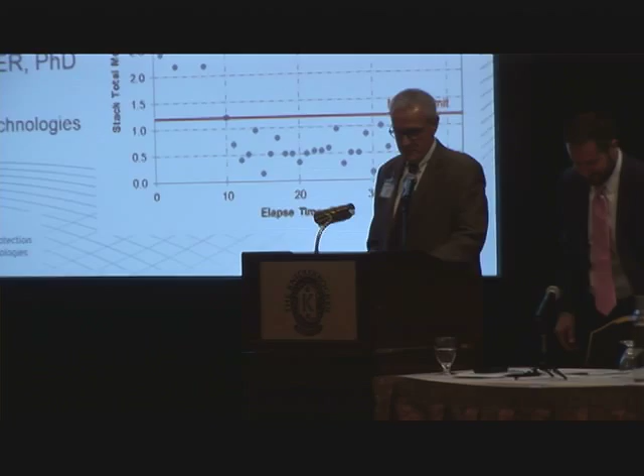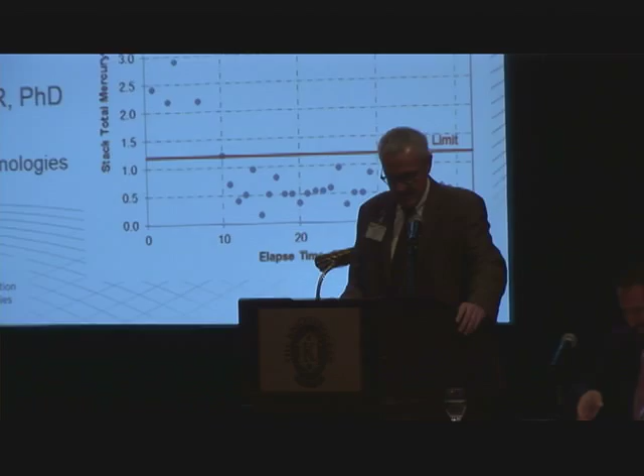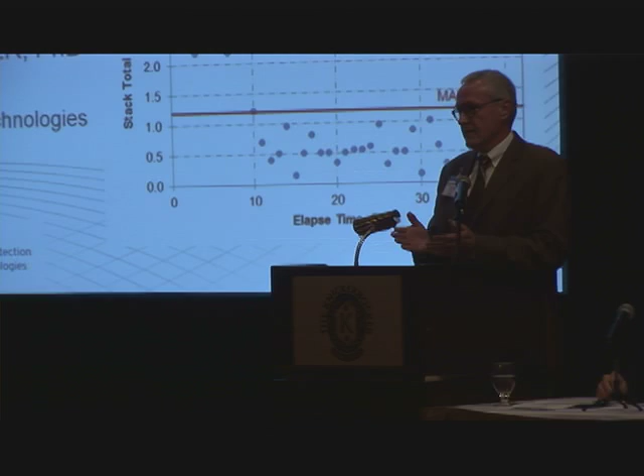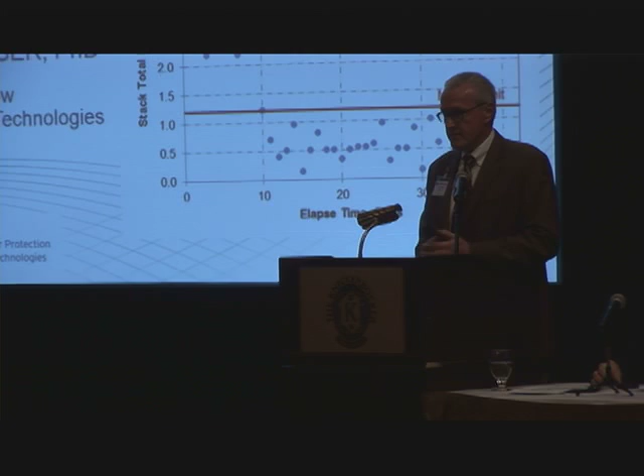Well, I'm not sure what I can do with more time. I'll probably go too long anyway, but I'll try and keep it to the half hour. I appreciate you taking the time to be here this morning. I'm a little bit in awe being kind of in between regulatory information that you really needed to know and the fact that we're seeing power generation evolve in Michigan. Evolution is really the part of this presentation I want to emphasize as we go through. I promised you at least four things you're going to learn: characterization, control and compliance, a strategy that puts you in control of your mercury emissions, and how to monitor and automate that process.

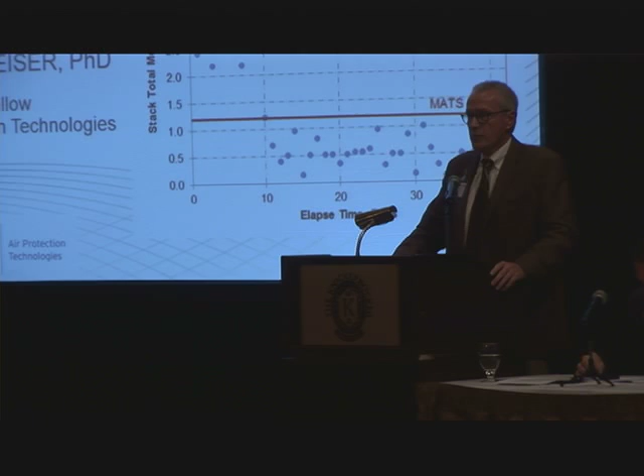Looking at the left or right side of this slide, on the left-hand side of the graph is where we are today. On the right-hand side is where we have to be starting next year, and we have to be there reliably, 24/7. I'm going to present the path to a reliable strategy: how to characterize and measure mercury in flue gas, then talk about the components in building your strategy, and finally a case study.

I want to start with a question and a show of hands, because I know I can get into a very technical meeting and everybody will go to sleep on me. So this is interactive: how many of you fly? Okay, how many of you are actually pilots? Okay, so the pilots go to sleep right now, because I'll probably not be technically correct on what I'm going to show you next.

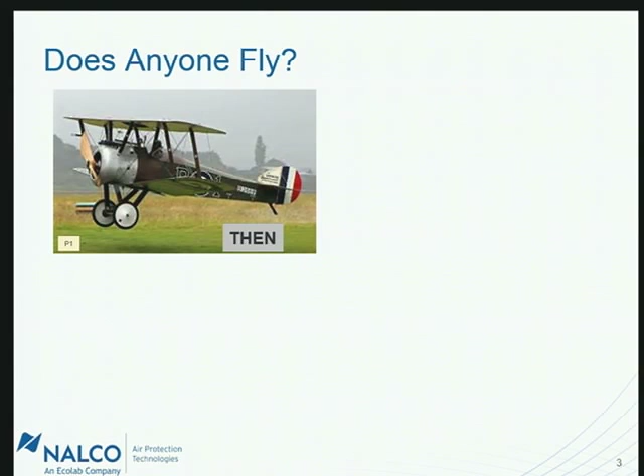When we started to learn to fly, we had an airplane something like this. And quite frankly, it had—hopefully it'll show up. Uh-oh, did I push the wrong button? Okay, I give up, it's supposed to go forward. Oh, there we go, thank you.

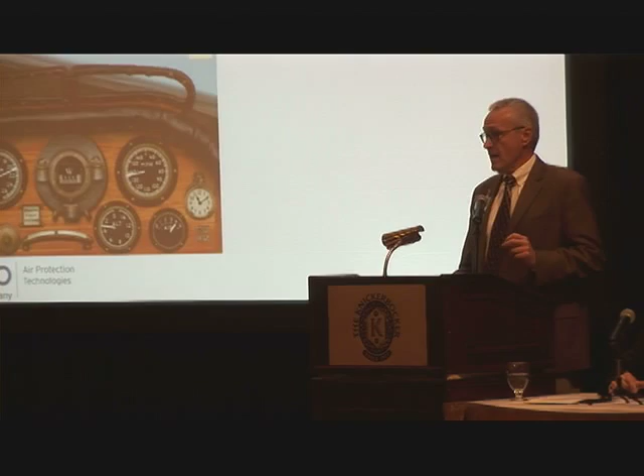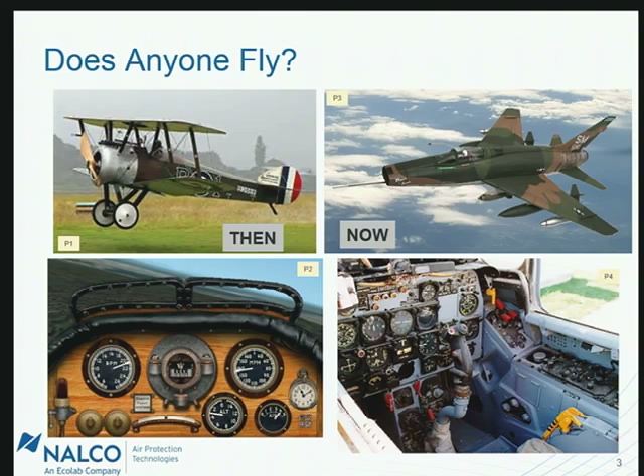When they started to fly, they had an instrument panel that looked like this. Very simple—it told you where you were going, what your engine was doing, and a little clock on the side so you could calculate how long you could stay in flight. That was great if you were flying visually, but as you know today, we fly through all kinds of weather most of the time, in the dark. So aviation has gotten more complicated, and as you can see, the new cockpit has many more instruments to go by. This is the evolution of flight.

Equally, there is an evolution in the power plant—an evolution in the control room from simply looking at air and fuel, mixing those, and looking at your heat output and the megawatts you generated, to also looking at what else we generate. How do we control mercury, as an example of a pollutant, going forward?

So there are basically five steps. You have to measure it first. You have to manage the speciation of mercury in the flue gas. You have to master it within the WFGD, if you're using WFGD as your strategy and control point. You have to monitor it continuously, just like you have to monitor the conditions, the quality, and the running of the engine of an airplane. And then you have to apply everything that you've learned.

Okay, I'm going to let you help me in the back.

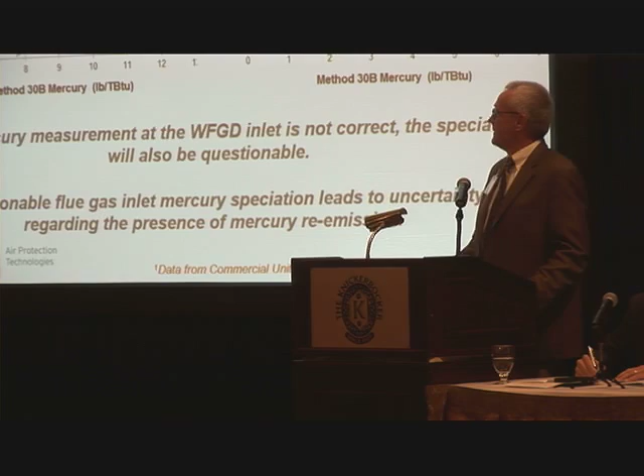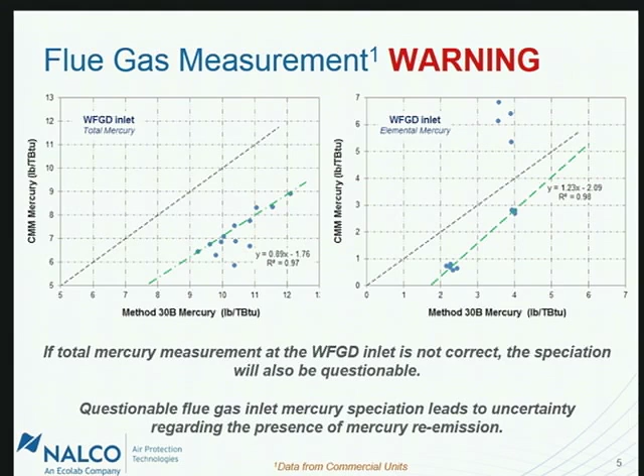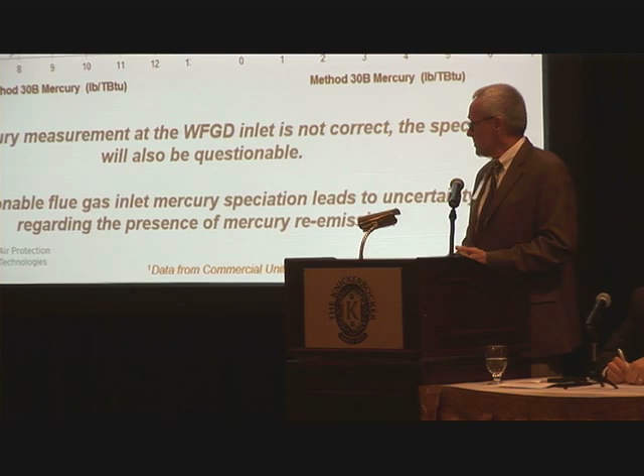This is the issue with measurement. The first and most important is making the mercury measurement in the flue gas. On the left-hand side, you see an example of commercial measurements being done, and they are far from being accurate with regard to flue gas mercury. If you drive your solution based on this information, you will be going in the wrong direction. So it's important first and foremost to have total measurements that are correct. If you get the total measurements correct, chances are you can rely on your speciation measurements as well. If you question the inlet data, you have to question all of your data, and you begin to wonder what is it that my unit is actually generating.

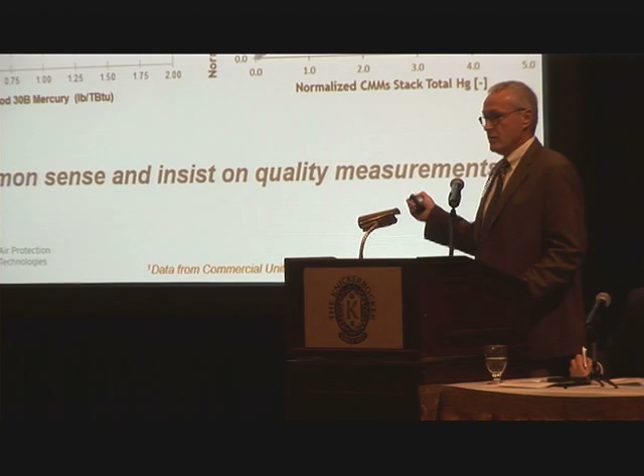Again, this is another example. On the left-hand side, a little bit better match between carbon traps and CMMs. The measurement of mercury in flue gas is not simple. There are a few organizations well embedded in this technology that consistently do a good job. This is good, but this is obviously much better in terms of your relationship and correlation between carbon traps and CMMs. If you're going to drive your unit based on CMMs, you better have a good correlation with what you're reporting to the regulatory body. So insist on quality.

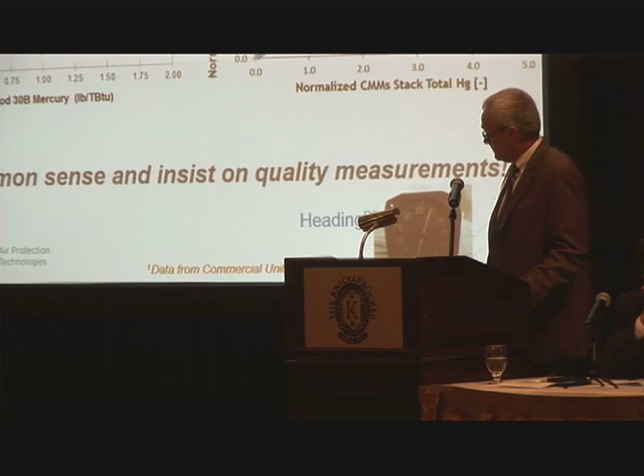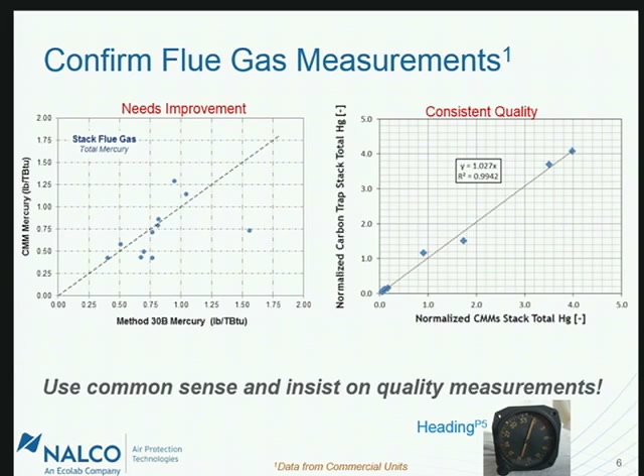To keep with the analogy, the measurement of mercury is a lot like knowing what your heading is. As a pilot looks to see what his heading is going to be based on this instrument, your measurement is the same thing. If you have a poor heading, obviously you're not going to end up in the right place.

Okay, so next, let's talk about managing mercury speciation.

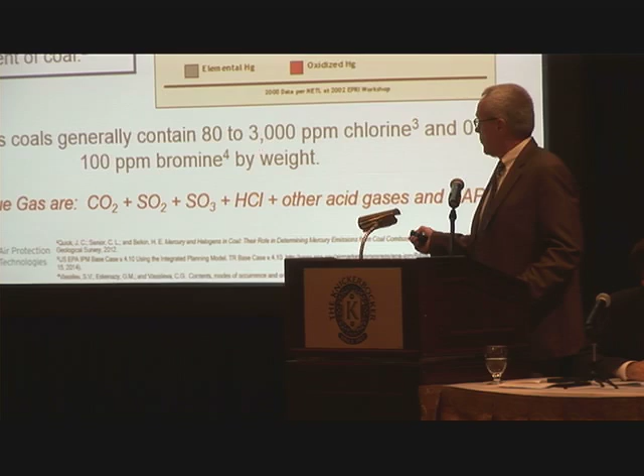Busy slide, you've seen a lot of this information before, you can take the time to read it while I'm speaking. But key among this is there are a lot of different forms of mercury, but if you're using a wet FGD to control your mercury emissions, you must maximize oxidation in the flue gas. That is done in bituminous coals. It's clearly correlated with chlorine content, and yes, there is a certain amount of bromine content in that coal as well. Both of those halogens will increase your speciation across the various air quality control devices.

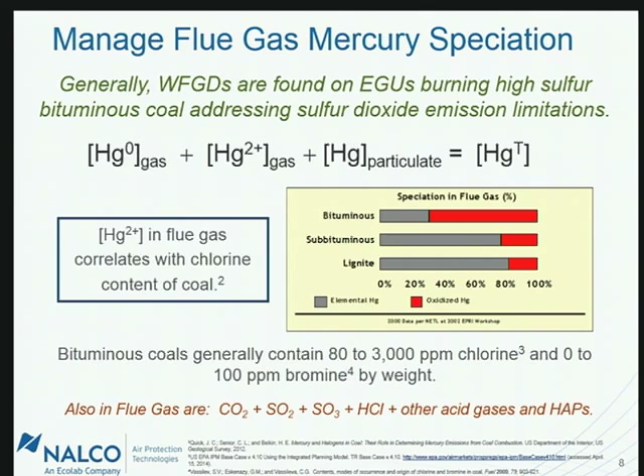Okay, I'm going to give up here. Next slide, please.

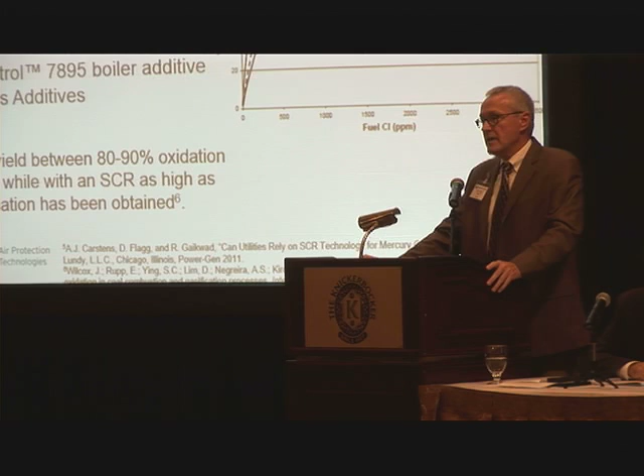To manage your speciation, there are three different ways you can do it. You can do it based on fuel, based on fixed assets, or based on additives. Fuel is simple — you take a low chloride content and a high chloride content coal and mix those. Fixed SCRs will, in fact, give you the co-benefit of increasing your mercury speciation. And then additives, boiler additives such as MerControl 7895, provide additional halogen. It allows you to fine-tune your oxidation of mercury across the unit. In fact, additive use will increase or provide you with, in the absence of an SCR, somewhere between 80 and 90% oxidation, and up to 98% oxidation with an SCR present.

You can see on the right-hand side of the slide, I apologize, a graph that was put together that shows the impact of age on an SCR, and the fact that as the SCR catalyst ages, you will lose oxidation effect on your mercury.

This is your altimeter. This tells you how high you are flying.

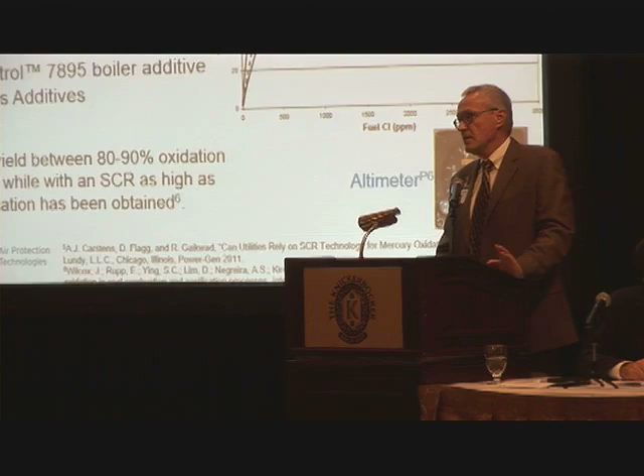Again, it's most important for you to maximize your oxidation, because with wet FGDs, only oxidized mercury is removed. Next slide.

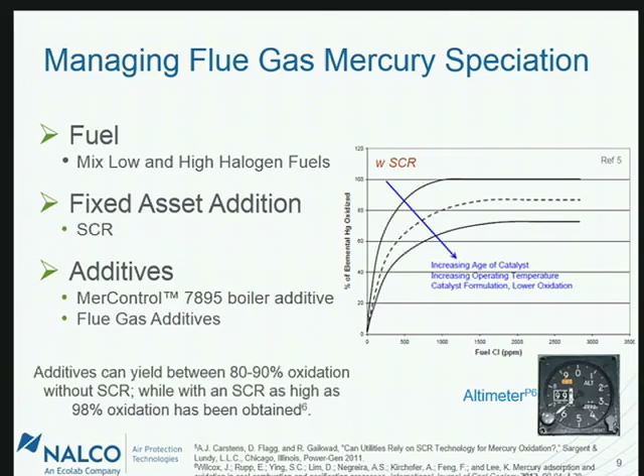Here's a quick summary slide. It gives you some quick comparison of performance, and there's a lot of information on here.

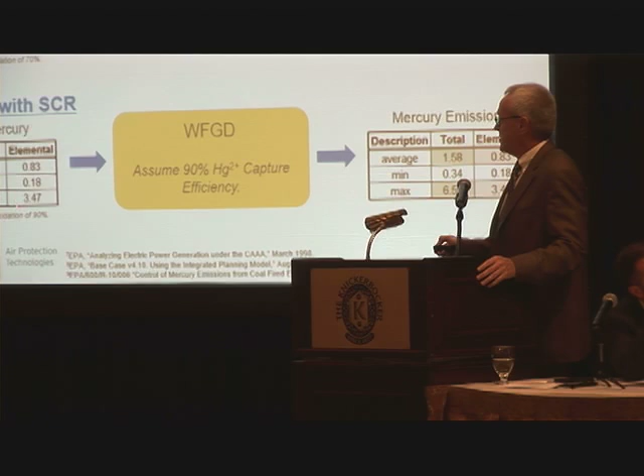I'm going to draw your attention to the two middle examples, and we can just look at the bituminous. Let's look at comparing with and without an SCR. You can see the difference in the flue gas mercury between the two, representing a 70% oxidation and a 90% oxidation of mercury. You can see elemental with an SCR is 0.83.

That is within compliance of regulations, and as a consequence, you can see as it comes through the wet FGD, assuming you have 90% capture of oxidized mercury, in the one case with the bituminous with an SCR, you are well within compliance. In the case of the lower oxidation, you can see that you are not near the limitations of the regulation, and that is exactly the point I'm trying to get across here.

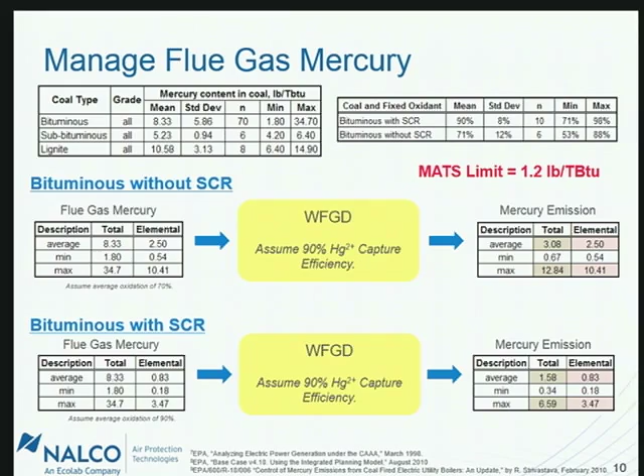So once you've prepared your unit and characterized it, you know what your mercury oxidation state is. The next step is to master your mercury across a wet FGD. Next slide, please.

Again, this is complicated, but only from a visual standpoint, I'm going to simplify this for you. This is taken from a couple different places. People have been talking about re-emission being complicated, and quite frankly, it's really simple. You can draw a red box, or a black box, however you'd like, around the wet FGD operation. Basically, not as some people would say two outlets and one inlet, you have in fact 2 inlets and 2 outlets for mercury around your wet FGD.

You can see what they are. You have flue gas coming in, which is your constant form of mercury coming in. Once it's inside the wet FGD, it either leaves through the clean flue gas, which is where we don't want it, or we want to control it with regard to compliance. And then it also leaves with the blowdown from the wet scrubber.

Now that blowdown contains, as shown here, as Gary Blythe did it pictorially, the blue being the water phase and the gray being the solid phase from the blowdown. So it will actually leave in both of those components.

And then you have another source of mercury entering your wet FGD, which is your reclaim water. Any of the water you're bringing back from filtration of the byproduct, or from waste ponds and things like that, will contain mercury, and some of those can contain very high amounts of soluble mercury. So if you're trying to manage your mercury across the wet FGD, you have to manage these basically 4 contributors or outlets.

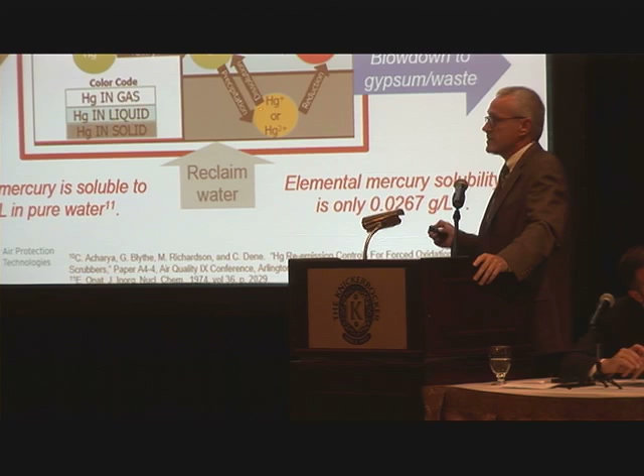And within the scrubber, yes, there is re-emission, and yes, there is a partitioning of soluble mercury between the solids and the liquid phase. All of this going on simultaneously, and as a result of changes you are making in the operations upfront of the wet FGD and on the backside of your wet FGD.

Upfront changes being things like load. The backside being things like how fast and how much water you're putting through your wastewater treatment plant at a particular time. You have to manage all of these things.

You note that the solubility of oxidized mercury is 4.8 grams per liter. It is the soluble species coming out of flue gas, and that's why you can get the co-benefit from a wet FGD. Elemental mercury is very, very insoluble; in fact, by definition, it is non-soluble. As a consequence, if it's generated within the scrubber, it actually is released back to the flue gas.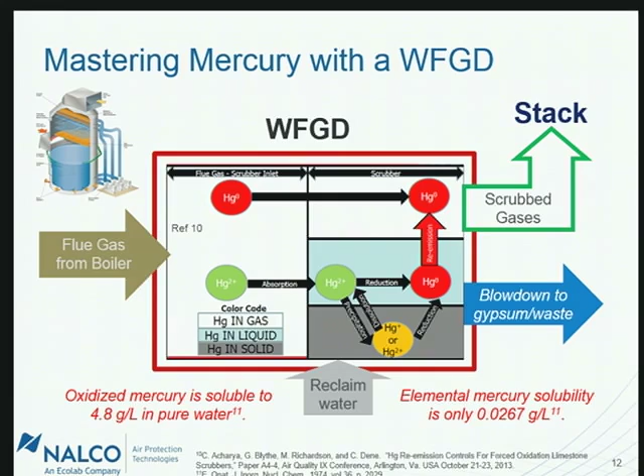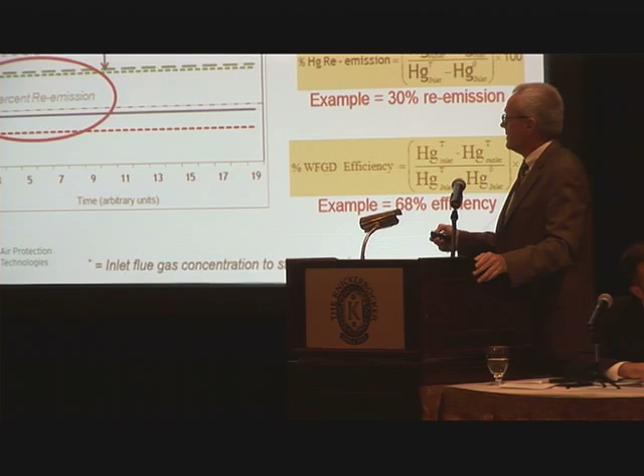And that is the reason, if you go to the next slide, you will see an illustration, a cartoon, of what you might see at your CEMs. You will actually see an increase from the inlet to the outlet of elemental mercury in the flue gas. If you make that measurement and see that increase, most likely you have re-emission.

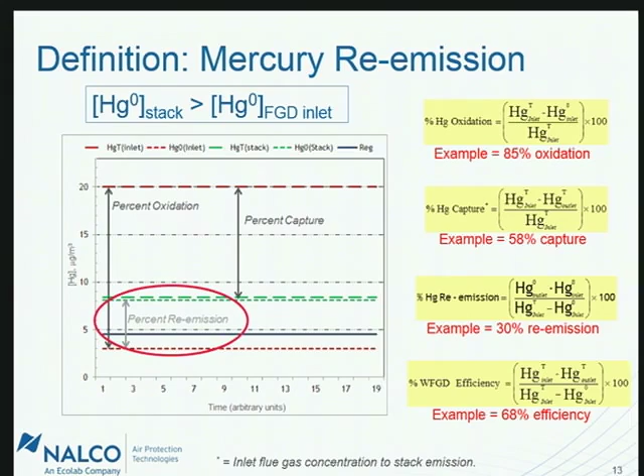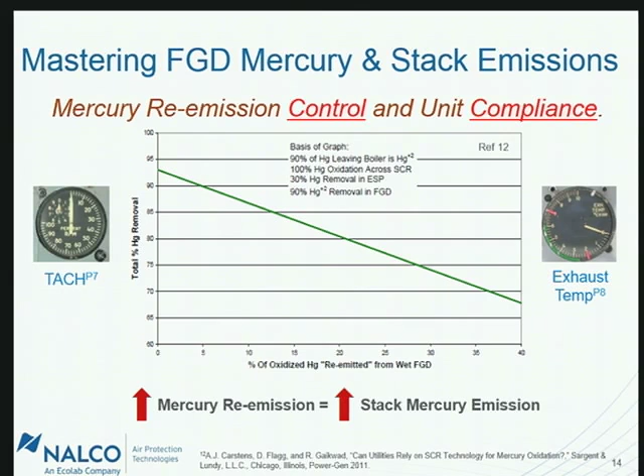Next slide. So this is, in fact, your tachometer and your exhaust temperature when you're looking at a wet FGD. This is how fast you can run, and this tells you how well your FGD is actually operating.

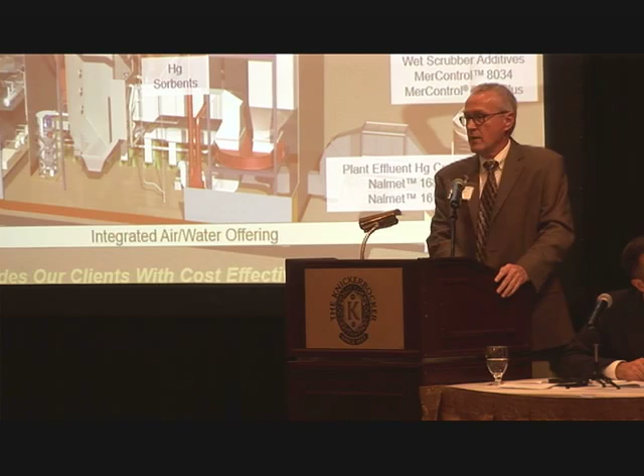It is about a holistic approach. We have been teaching this from the first presentation that we made. It is about controlling speciation coming in, controlling what's going on within and around your wet scrubber, inside the red box, with regard to mercury, and about controlling what's going on in your wastewater side, which controls the mercury content of that water being returned to your scrubber. And we want you to reclaim water. That is a good, environmentally sound practice.

Next slide, please. So let's consider the final step, which is controlling mercury re-emissions, which is consistent operation, the use of additives, and then automation. So let's get into the details within the red box for a few minutes. Next slide.

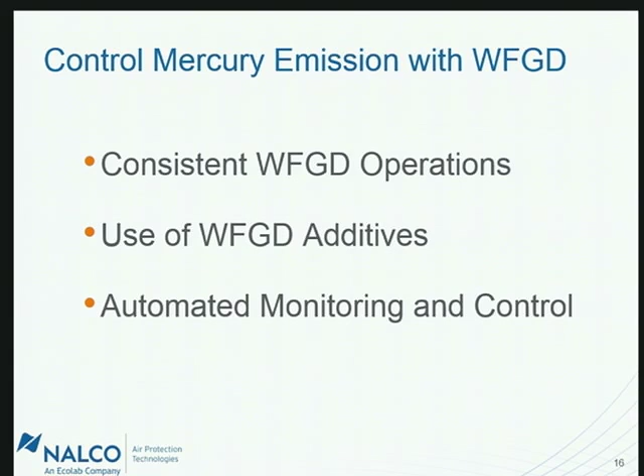You have to maintain some consistency within your scrubber. The days of flying an older plane in just visual mode for your wet scrubber are gone. You have to monitor your wet scrubber consistently, make sure that it's running consistently. Things like sulfite concentrations, chloride or bromide or halogen concentrations within your scrubber, and certainly pH and ORP are key indicators that will tell you how your scrubber is operating.

These are some guidelines. I hate to put these up here, but everybody wants to see them. These are simple guidelines. They are not true for every scrubber. They may not be true for your scrubber. Your scrubber operation will have a sweet spot based on the fuel that it's running and based on the load swings and the load that it is running and the capacity.

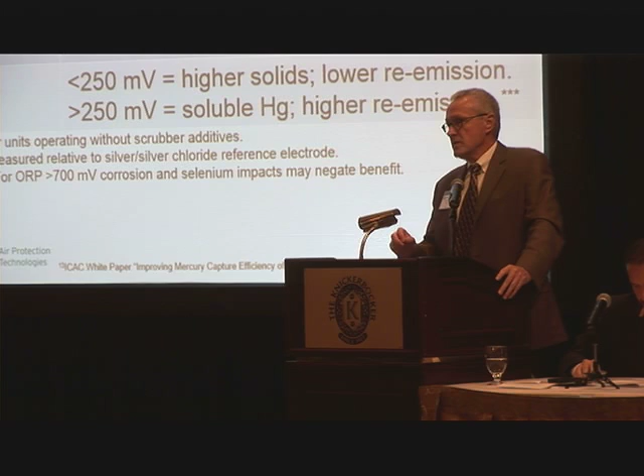These are also not methods to rapidly respond to excursions in mercury emissions at your stack. These are long-term, consistent operational variables. You cannot bring a scrubber into control by trying to increase your halogen content from 10,000 parts per million to 20,000 parts per million overnight. You will get a benefit from that, but it is not on the order, in most cases, that will control your excursion very quickly.

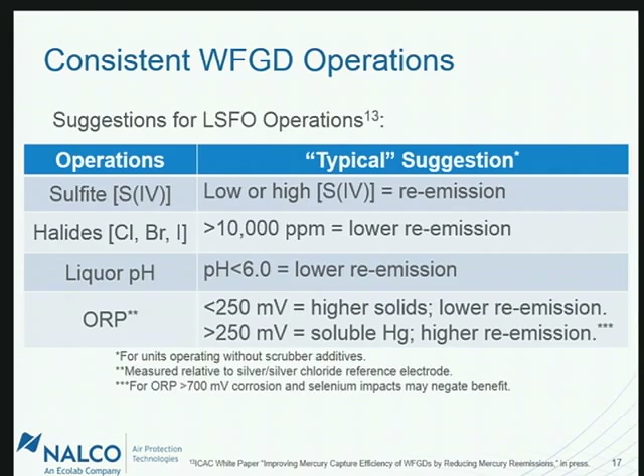Next slide, please, as an example. Scrubber additives are a group of chemistries that are added to the scrubber that will control the solubility of the soluble mercury within your scrubber.

Here is a group of them. Obviously, I've highlighted, since I represent Nalco, our products, the MerControl 8034 and 8034 Plus. These are the things that you can use that immediately change the excursion or the severity of that excursion at your stack, and can be used to control consistently and reliably the emissions based on a wet FGD.

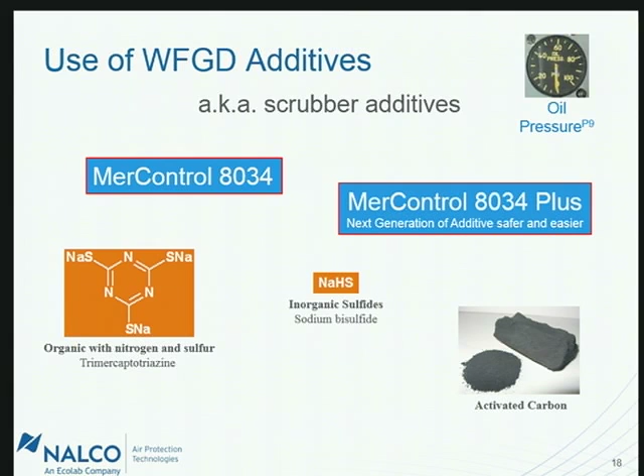So, next slide please. This is basically your oil pressure indicator. If you have this type of oil, your engine is going to run well, it's going to run smoothly, and your scrubber will pull out ionic mercury. Next slide, please.

So monitoring and control. It's all well and good to simply get it started, have a wet FGD running. What is control versus compliance? So let's go to the next slide, please.

Like everything else, as we were saying, evolution is coming to the running of a coal-fired power plant. You started with a few instruments. We're going to have to add more, because now we know that we have to monitor and respond to changes that are occurring within that wet FGD. We do that by continually providing a monitoring and sensor array that continuously looks at the conditions of what's going on within that scrubber. We input, in addition to that, process inputs, things that you control at the front end, things like the load, because we're going to be doing a heck of a lot more load swinging these days than we did in the past. Those all impact what's going on within your wet scrubber.

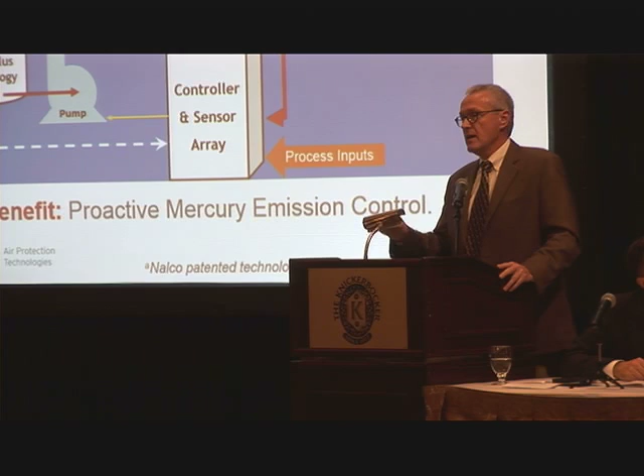Next slide, please. The benefit here is that you take a proactive response instead of a reactive response. What do I mean by that? Instead of reacting to an excursion that occurs in your stack, running around trying to figure out what you're going to do to bring that excursion down so that you can meet your compliance limitations, you do it ahead of time. We can recognize where that spike is coming from and make appropriate changes to the chemistry within the scrubber before it happens.

This is your attitude indicator. This tells you whether you are climbing or diving, banking left or right in an airplane. And believe me, having some experience with this indicator, if you stay in a diving mode too long, it's not really good for you. It usually ends up with something called a crash. Thank goodness it was in a simulation. Next slide, please.

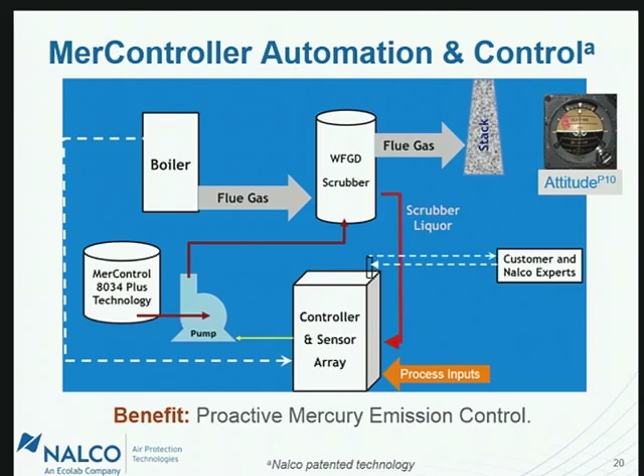So finally, let's talk about the application. Let's actually look at a commercial example and see how it worked out. Next slide, please.

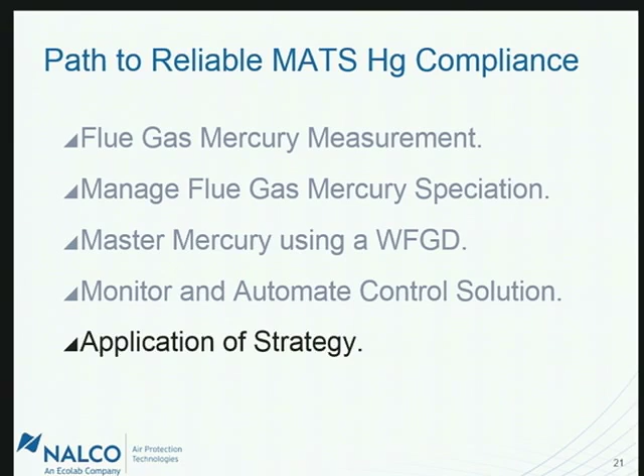This particular example is taken from a unit burning bituminous coal. You can see the specific conditions described, and we were specifically looking at two mercury monitoring points.

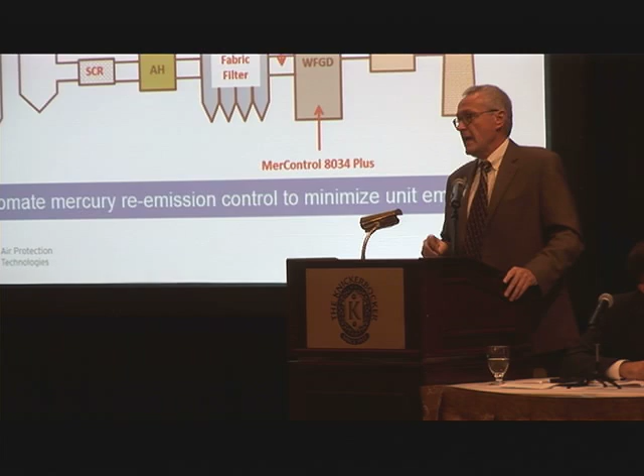I'm not going to go into a lot of detail, but please trust me that we made multiple measurements by both 30B and CEMS to make sure the two were reliable and the numbers we were getting were correct. You'll notice this unit has an SCR, a fabric filter, then a wet FGD, and ultimately a wet ESP before it goes to the stack.

The goal of this particular test was to automate mercury re-emission control—in other words, to control mercury re-emission automatically to enable compliance and minimize unit emissions.

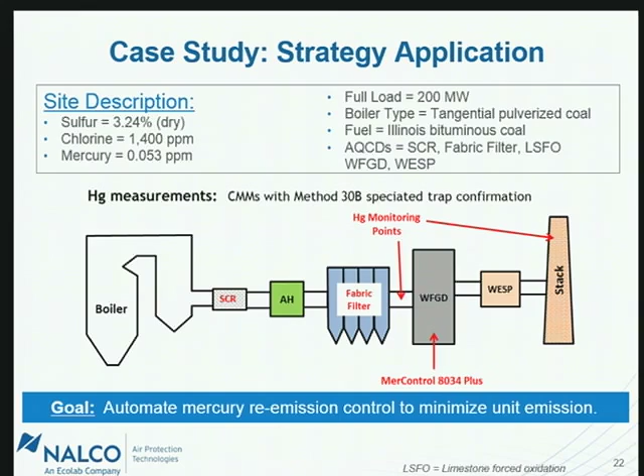Before we go to the next slide, I jumped the gun. You can see the disadvantage of trying to treat the spike or excursion once it's started. This is a reactive method of control, and as a consequence, how effective you are at minimizing that excursion depends on how quickly you catch it.

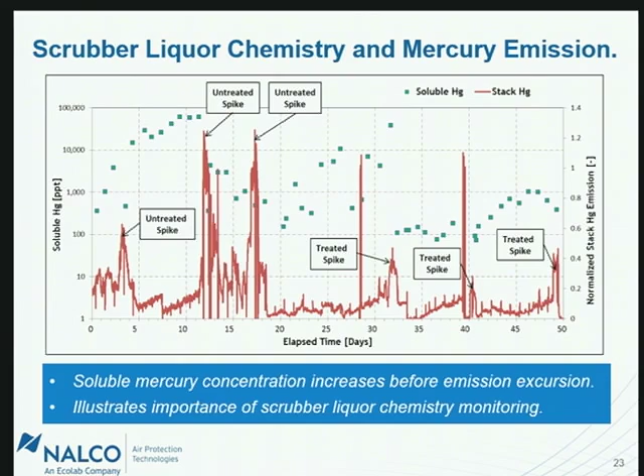What happens if you become proactive? If you become proactive, you get exactly what I promised from the title of the presentation: a proactive method of automation and control that gives you reliable control over your stack emissions through a wet FGD. You are now managing the mercury within your wet FGD.

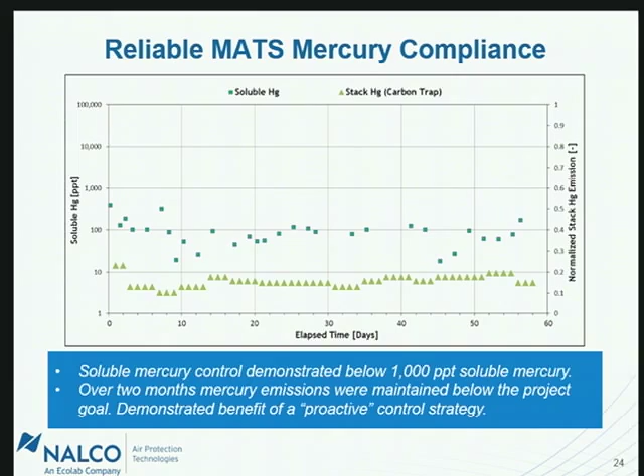So in conclusion, I'd like to point out that increases in stack mercury emissions are the result of mercury re-emission—a result of not controlling your mercury within the wet FGD. You can get reliable control and compliance through the application of control mechanisms for mercury re-emission, and you can automate this process so it's consistent and reliable, taking a lot of pressure and risk out of it.

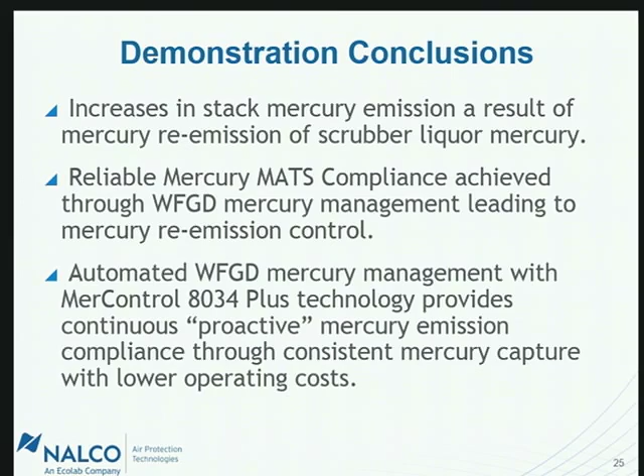Going forward, beginning next year, you want to pay attention to the instruments. In 2013, we all read about the Dreamlifter flight that took off from New York and landed at the wrong airport. Why did they do that? Because they weren't paying attention to their instruments. This is an oops we do not want to experience after 2015 with coal-fired power plants.

So it is getting more complicated. I apologize for that, but it's an evolution of generating consistent electricity using coal-fired power plants while providing reliable mercury MATS compliance. Any questions?

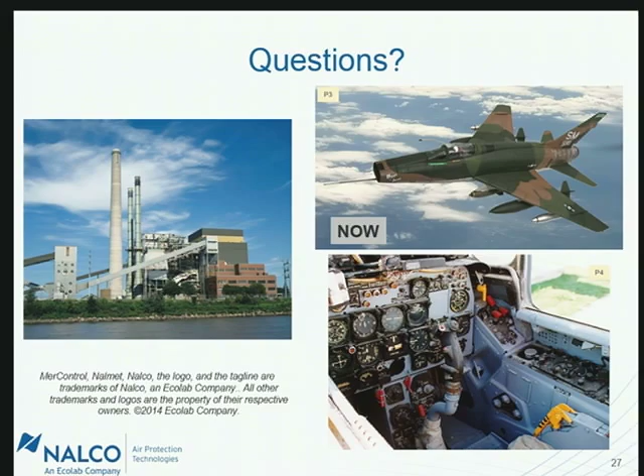Any questions? One here in the front. Great presentation, Bruce, thanks. I had two questions, actually.

You showed some measurements of soluble mercury in a slide. I wondered if those correlate with ORP measurement at all. And secondly, when it comes to testing for re-emission, obviously measuring speciation is key. In my personal experience, the use of carbon traps for speciation was quite unreliable, but I understand they've come a long way since. Do you lean more towards CMMs or traps for speciated measurements? If you had to pick one over the other, which one would you pick?

Okay, those are great questions, Rich. Thank you. The first question is whether there's a relationship or correlation between soluble mercury in your wet FGD liquor and the ORP. There is a correlation to some extent.

It's a complicated answer, and I apologize. I'm a technologist. The simple answer is if you have an untreated scrubber, there is a correlation. Gary Blythe has demonstrated this at several different locations, that there is a partitioning between the mercury, between the solids and the soluble phase. Recall there was the blue phase and the gray phase. If your ORP is fluctuating over 200 to 300 millivolts, you're actually changing that solubility distribution with equilibrium within your scrubber. The higher the solubility concentration is, the more likely you are to get reemission. We control reemission by removing soluble mercury because that is what will be reduced.